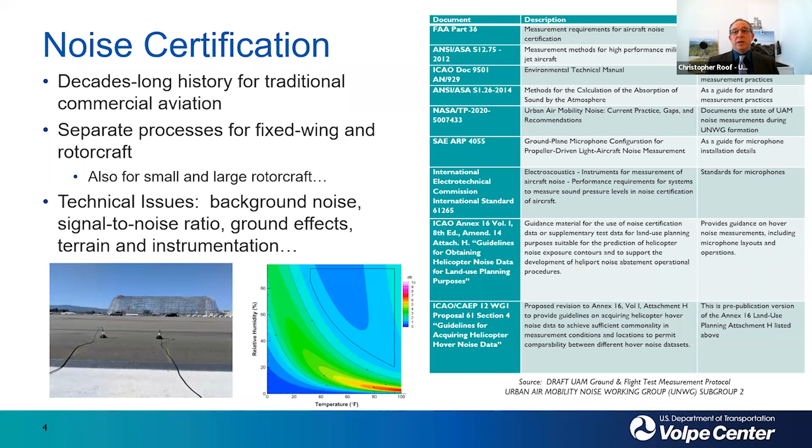Over on the right, you'll see a table assembled in a Urban Air Mobility Noise Working Group, or UNWG, document led by Dr. Rizzi. That highlights a number of the references and standards from the traditional noise certification world, which may inform noise certification for UAM.

So there are a number of novel technical issues that may be considered as a part of noise certification of new and emerging vehicles. Thankfully, FAA, through its Ascent program and otherwise, has invested in a number of these aspects.

So in the upper right, you'll see a picture from a Penn State project, Ascent Project 77, looking at wind speeds directly on the vehicle. Now, this is an unmanned aerial vehicle, in this case, much smaller technology, but these types of concepts may very well be relevant to AAM vehicles as well.

Others have been looking at the implications of individual phases, rotor phase, and the directivity of these vehicles.

So moving forward, how do we treat advanced air mobility noise certification? I've already noted that it's not the legacy Boeings and Airbuses of the world. There are many players in this world, some new to the aviation sector and probably more to come in the future. The technologies themselves can be

rapidly evolving at times. The missions of the vehicles themselves also can be quite different than a traditional rotorcraft or fixed-wing aircraft.

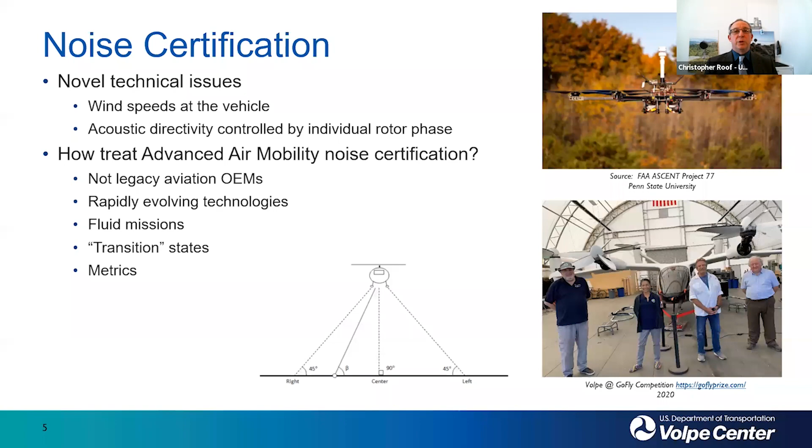Some of these vehicles, like a tilt rotor, may have transition states, which may need to be considered in the noise certification process. And what metrics truly are best for these vehicles? All these are being considered by FAA, NASA, industry partners, and a number of working groups, but they're all important for consideration. So in terms of characterizing these vehicles for noise certification, collaboration is an important aspect.

FAA and NASA have long-standing relationships where NASA works the fundamental research issues, and then FAA uses that learning to sort of set up the regulatory frameworks for vehicles. In addition to the FAA-NASA relationship, other government entities are certainly engaged and actively now as EASA and the UK CAA, among others. But within ICAO, other industry and partners can be engaged as well.

So within the FAA, there's an individual vehicle white paper process that's been undertaken. And with this for AAM, one can certainly certify a vehicle under the existing rules if warranted. Those are Appendix H and J of FAR 36 for large and small rotorcraft, or Appendix K for tilt rotors.

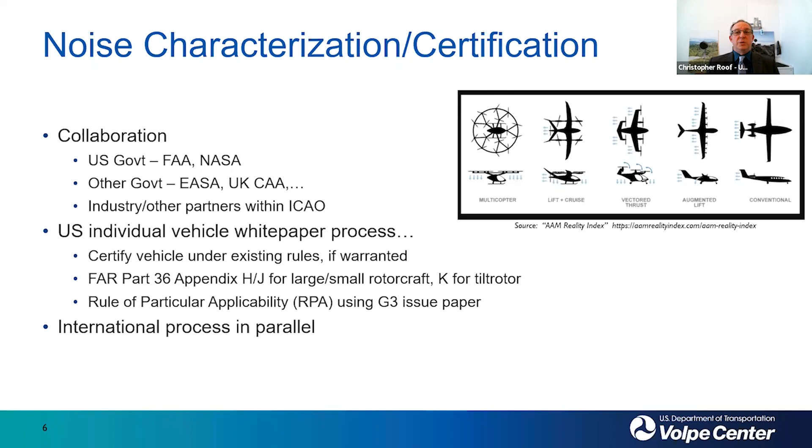But absent of the direct applicability of those specific existing procedures, a rule of particular applicability, or RPA, using a G3 issue paper can be used. In parallel, there's also the international process being coordinated with ICAO, the International Civil Aviation Organization.

Now, echoing some of the comments that Julie made earlier, I want to talk a little bit about noise modeling and its use and support of environmental analysis in general and NEPA in particular.

I want to take this quote directly from FAA's AAM implementation plan: in order to determine whether compliance with NEPA is required, the FAA will need to identify whether there is a major federal action triggering NEPA. So clearly, like Julie said, if it's on a commercial airport with a federal action, NEPA would be triggered. If other things may trigger NEPA, that process will be invoked. But there are certainly many opportunities for vertiports and AAM operations where NEPA may not be triggered.

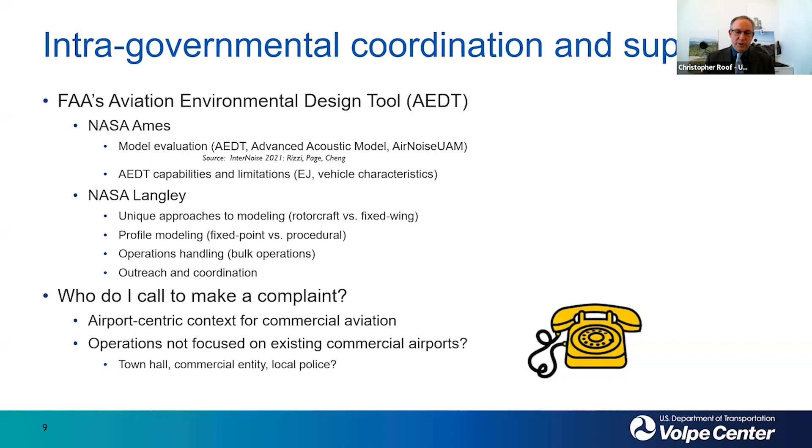So speaking of outreach and coordination, given the airport-centric nature of commercial aviation over the last several decades, there are procedures in place to reach out to either the noise ombudsman at FAA or your local airport noise office if you have a complaint about aviation noise. Thinking about operations not specifically focused on commercial airports, what is the protocol for people to do? Is it to call your town hall, look at the logo on that AAM vehicle flying overhead and call that commercial entity, or reach out to your local police? These types of things will need to be addressed moving forward to make sure everybody's on the same page and we can engage the communities as effectively as possible.

Additionally, we provided noise model improvements to the Advanced Acoustic Model directly for the industry. They came to us wanting greater fidelity in the frequency domain. Previously, the model had one-third octave band capabilities, and we added in one-twelfth octave band capabilities for their use.

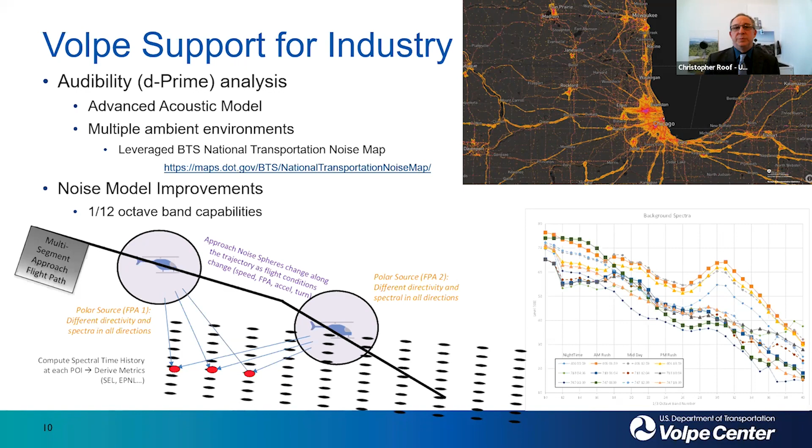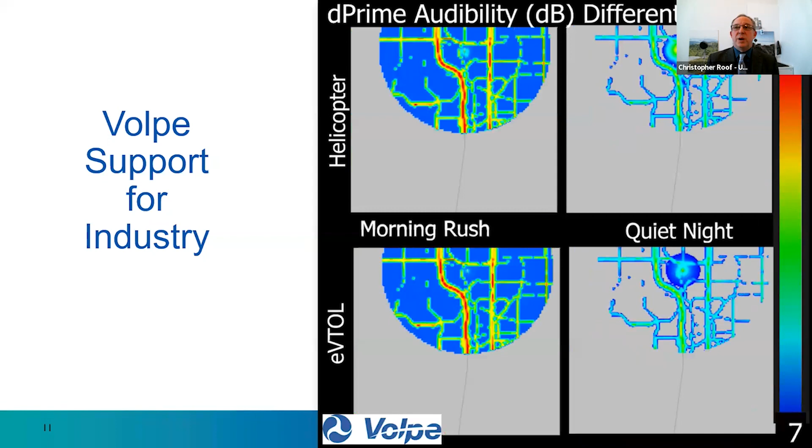So I'll just give you a visualization of that support to industry. Looking at these four quadrants, the top two show traditional rotorcraft or helicopter, and the bottom two a notional eVTOL. On the right is the ambient used for this audibility analysis, a very quiet nighttime ambient, versus on the left-hand side a morning rush hour, more activity and louder ambient. So as you can see, there are differences in the audibility for these two vehicle types, as well as based on the different ambient that is used.

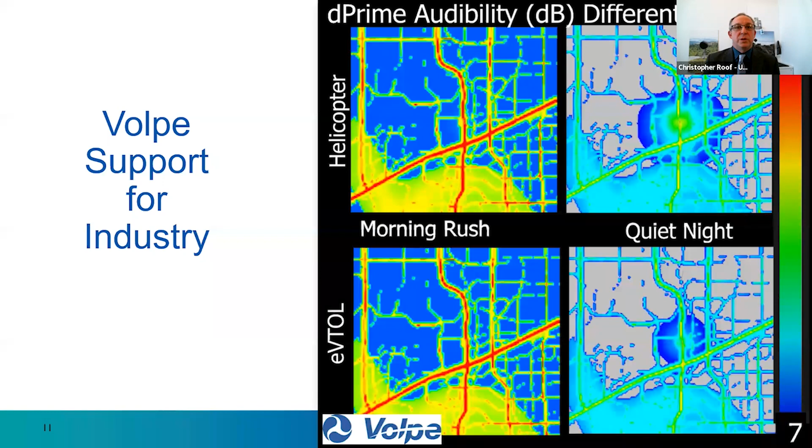So these are some of the kinds of tools that are available to help engage community members and work with industry and government alike. So with that, I'd like to thank you for your time.

Thank you very much, Chris. Excellent presentation. It was technical, but I actually understood it, so you hit the right mark.

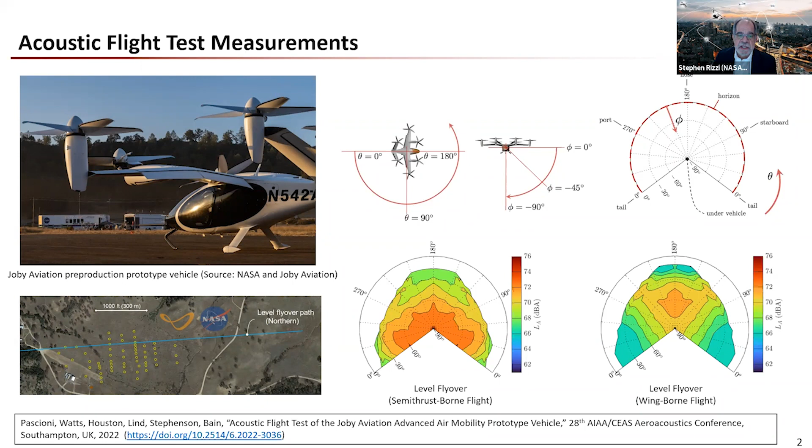So the remainder of this presentation focuses on the prediction side of the house, and how those predictions may be used to help understand and mitigate community noise impact.

NASA has developed a tool chain for analysis of noise and performance of VTOL vehicles, including eVTOL. I don't have time to go into all the detail here, but the three main elements along the diagonal include a conceptual design tool called NDARC, and a comprehensive analysis tool that may be used for that — two commercial codes may be used for that, CAMRAD 2 or CHARM.

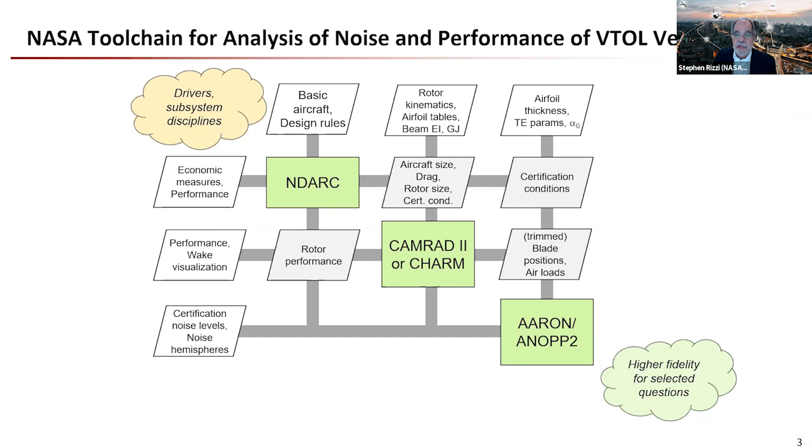And then acoustic analysis using the NASA Aircraft Noise Prediction Program 2, or ANOPP2, and its rotor noise tool, AARON.

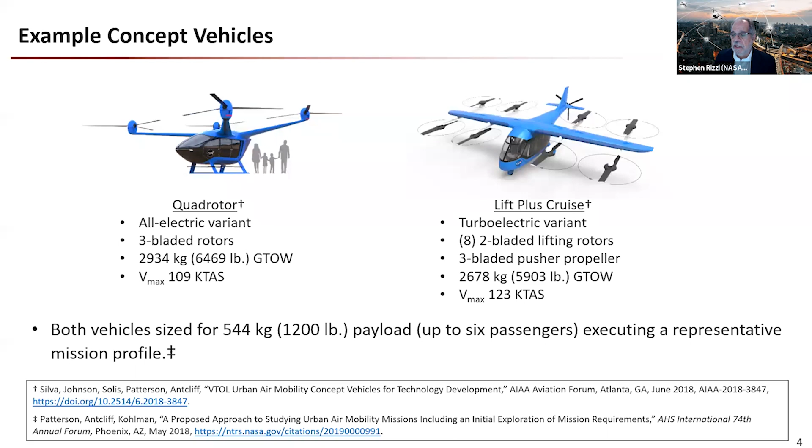As we dig a little bit deeper now into the source noise prediction, but not too deep, the process results in what we call source noise hemispheres.

It's important to note that many eVTOL vehicles have redundant controls, which allow the vehicle to achieve the same flight condition in a number of different ways. The noise can be significantly different in each of these control strategies, so optimizing the trim strategy for low noise is an area of active research.

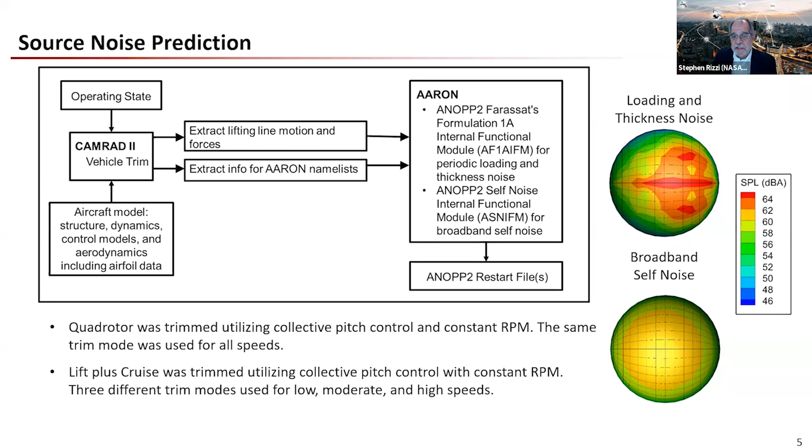We can sit in front of our computers and generate a lot of data, but how do we know that data are correct? To address that, NASA and others have conducted acoustic testing of isolated and installed propulsors to build an experimental database for noise prediction model validation.

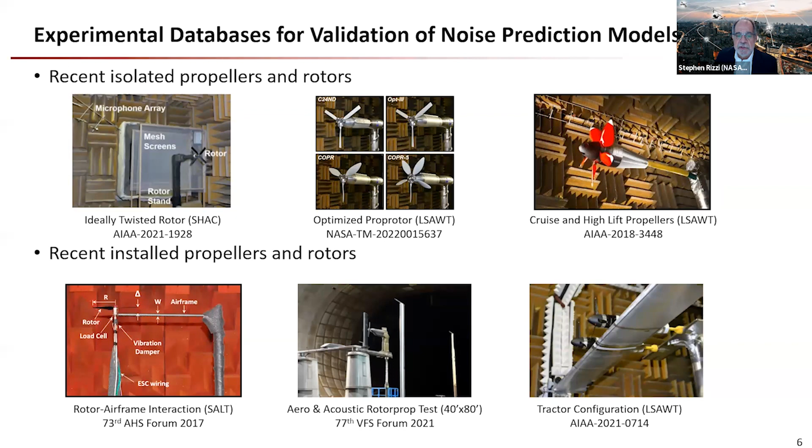These tests are performed at different scales and with different installation effects, so that NASA and others in industry and academia may identify and remedy shortcomings that we find in our predictive models, since many of these models were developed for traditional rotorcraft operating under different flight conditions.

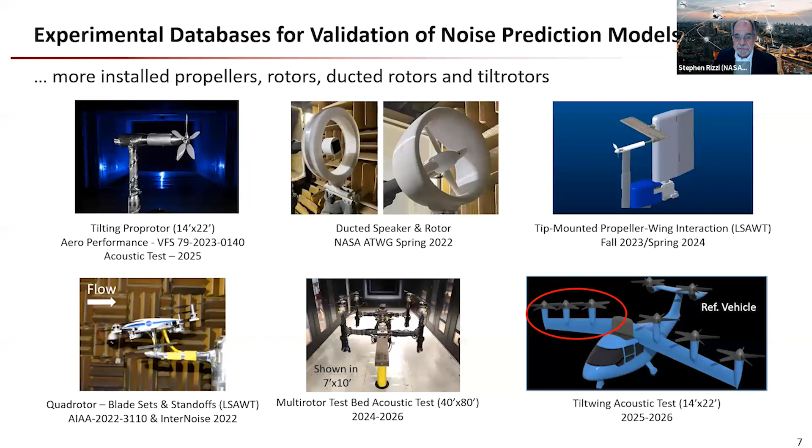Now that we've got that under our belts, we can talk about the more interesting part: what do we do with these data? In the next series of slides, I'll take these on one by one.

In the following, I'm not suggesting that noise certification be performed by analysis. I instead intend to show how analyses can be used during the design phase to assess noise measures that are used in certification. As previously noted, but worth reiterating, NASA is not a regulatory agency within the United States federal government. Our role here is to perform research that may later be used to support future regulations by the FAA and other regulatory bodies.

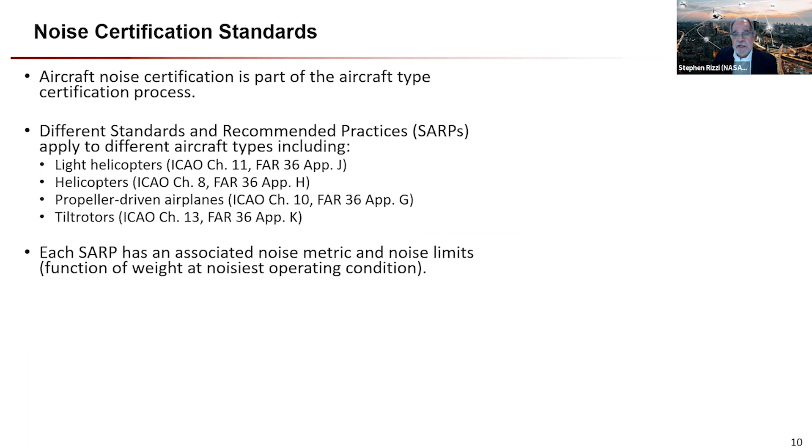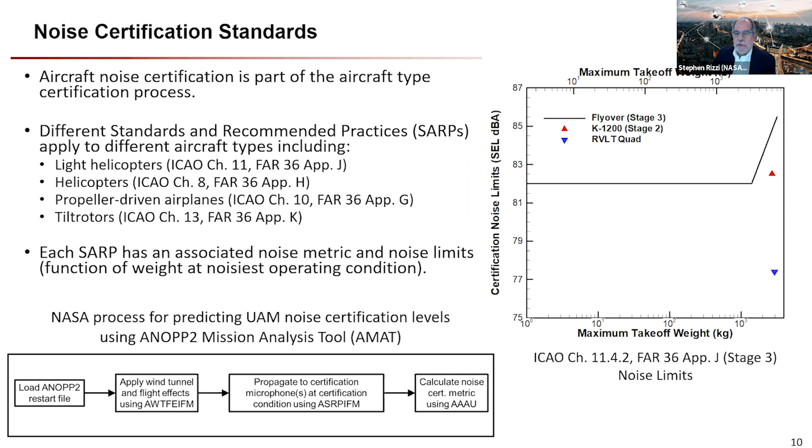Next is perception-influenced design. The main idea here is to include human perception into the design of the vehicle beyond that captured by the cert metrics. I'll show an example of a single propeller just to demonstrate the approach.

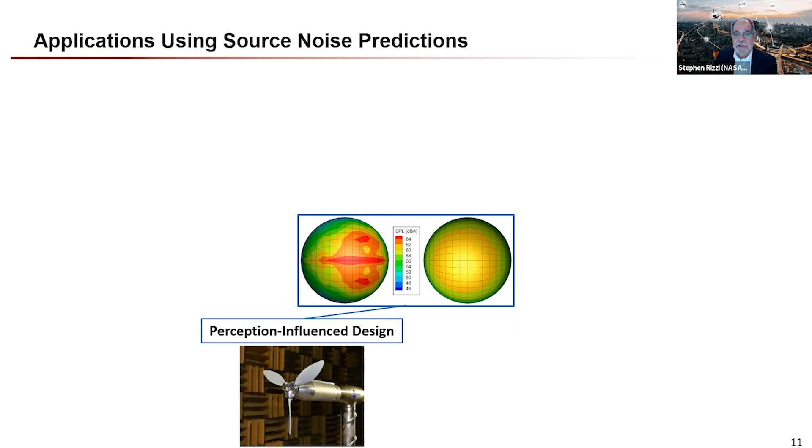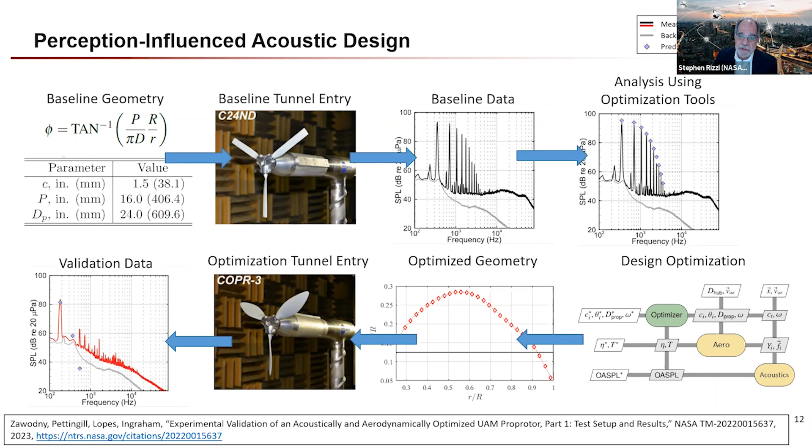That's all well and good if we know what metric it is that we're trying to optimize on. But sometimes we don't know that, and we need to use a couple of other tools to better understand the human response. Those are auralization and psychoacoustics.

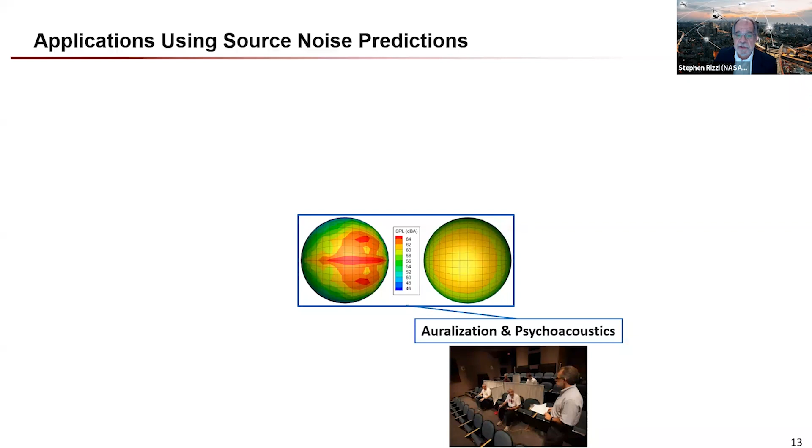It may be counterintuitive, but most of our analyses generate a number, for example 60 dBA, but that tells you nothing about what it sounds like. Auralization can be used to turn our source noise predictions, those source noise hemispheres, into something that we can listen to. It can be used for community engagement, but here we're going to use it to generate test signals for psychoacoustic studies. The NASA Auralization Framework, or NAF, has been developed for this purpose.

In the last couple of years, we've performed 3 psychoacoustic tests in the NASA Langley Exterior Effects Room shown on the right. This is a psychoacoustic laboratory with spatial audio that simulates various flight operations.

In the first test of UAM sound quality, the objective was to investigate how annoyance varies with sound quality, things like how tonal or impulsive the sound is. The main finding was that UAM sounds are more annoying than a reference sound played at the same level, meaning loudness is not the only factor affecting annoyance.

The next test, on noise and numbers, investigated how annoyance varies with the number of operations and spacing between those operations. The main finding was that scenarios having the same average sound level over about 4 or 5 minutes do not produce equal annoyance, meaning the number of events also affects annoyance.

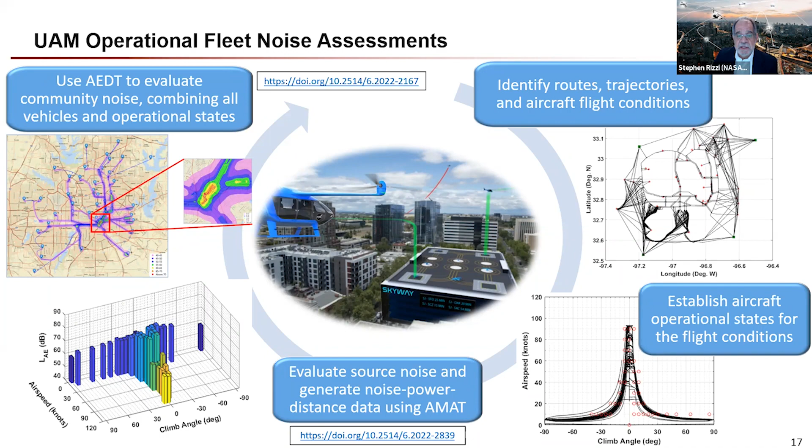The acoustically aware flight control and the acoustic flight simulator are 2 applications geared toward how we might operate the vehicle to minimize the noise footprint on the ground.

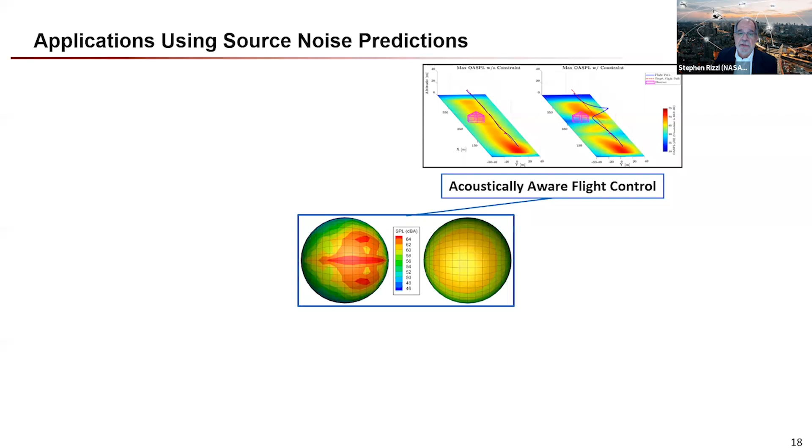In the first, the acoustically aware flight control, this automatically changes the vehicle trajectory and the operating condition to minimize the noise at some noise-sensitive area, for example a school. In the simulation, you can go ahead and click on that.

A noise constraint of 65 dB is imposed. For the case on the left, the straight line route exceeds the limit at both observers, that small pink dot, and then the larger building. And then for the case on the right, if you maybe do it again,

the vehicle changes its trajectory and the operating condition to meet that constraint. And this can be performed dynamically. So if something pops up like another aircraft, the control can change on the fly. The researchers who are involved in this effort are looking for opportunities to test this control in flight.

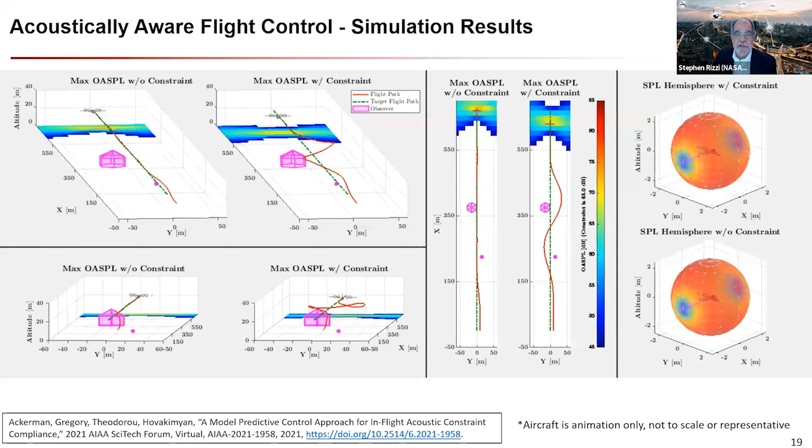Next slide, please. The last application is an acoustic flight simulator that may be used, as Chris indicated, to train pilots how to fly neighborly. That is, fly the route in such a way that it reduces the noise footprint on the ground.

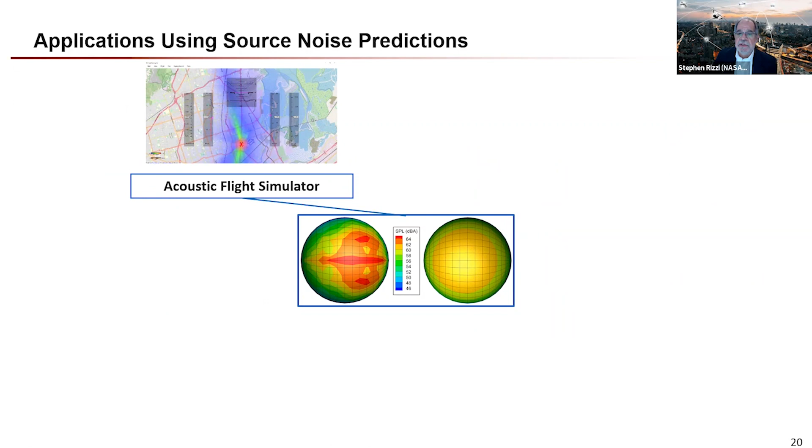Next slide, please. So on the left side of this chart, the simulator is used to generate helicopter noise footprints in response to real-time inputs from a pilot. This capability was developed to support the FAA Fly Neighborly program. If you click on that graphic on the left in the middle, the movie will show how the A-weighted sound pressure level contours change as a result of the pilot input.

Now, we don't quite have the real-time capability for UAM yet, as is on the left-hand side. However, what we can do is to record and replay various low noise operations to guide us or point us in the right direction. Next slide, please.

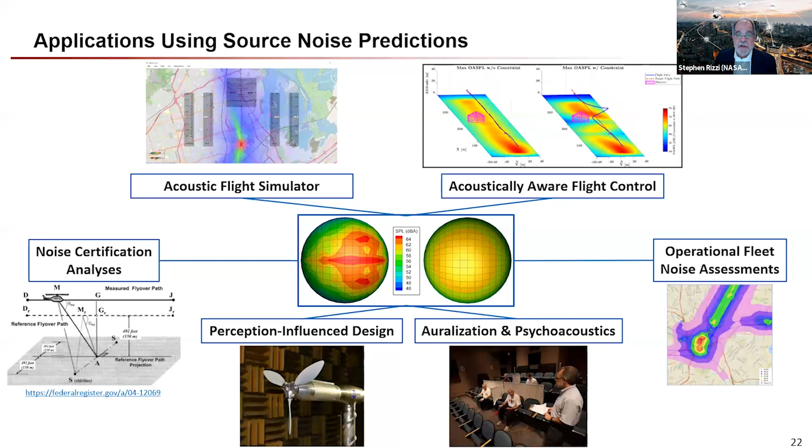Next slide. And with that, I thank you and acknowledge the support of the NASA program supporting this effort.